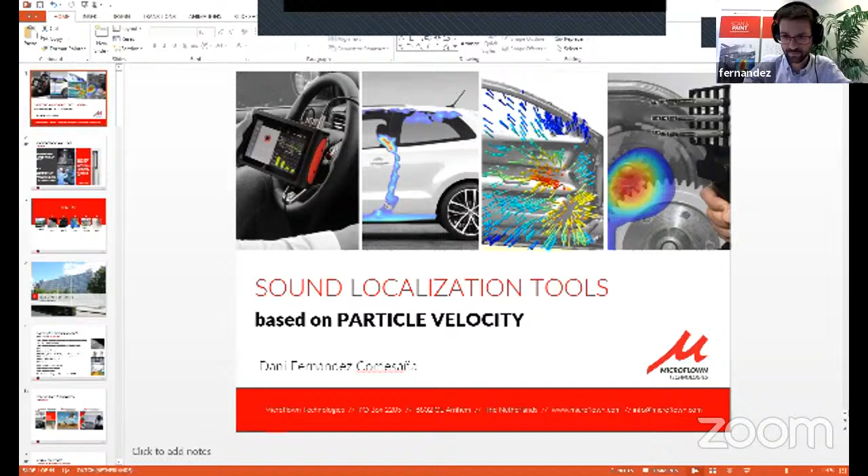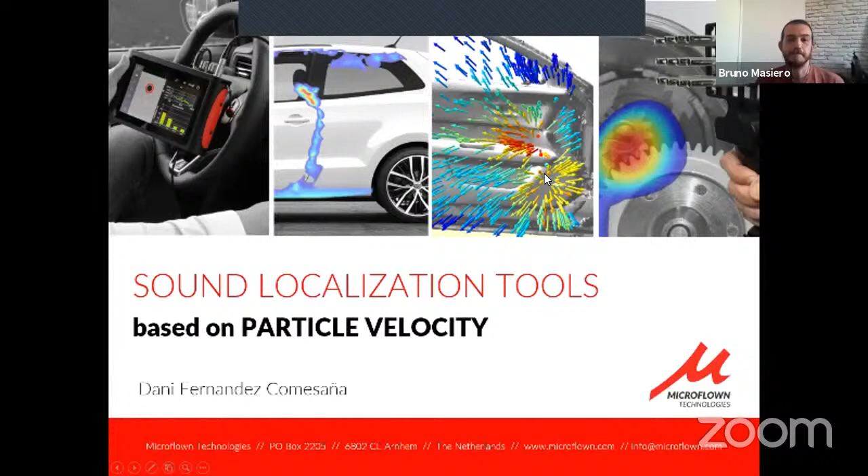Can you see the slides now? Yes, we can. All right, so I'll continue.

Oh, can you hear me now? Yes. Hello? Yes. Okay, so you couldn't hear me before, I guess. No, we could. Oh, all right.

So the motivation for this presentation is to give you an overview of the techniques and tools that we have nowadays for solving acoustic problems. This has been a constant problem for many years. For example, at the beginning of the last century, they already started making some tools that they thought were not only useful, but probably fashionable. But nowadays we still have problems, although we've had a lot of time to improve upon what we use.

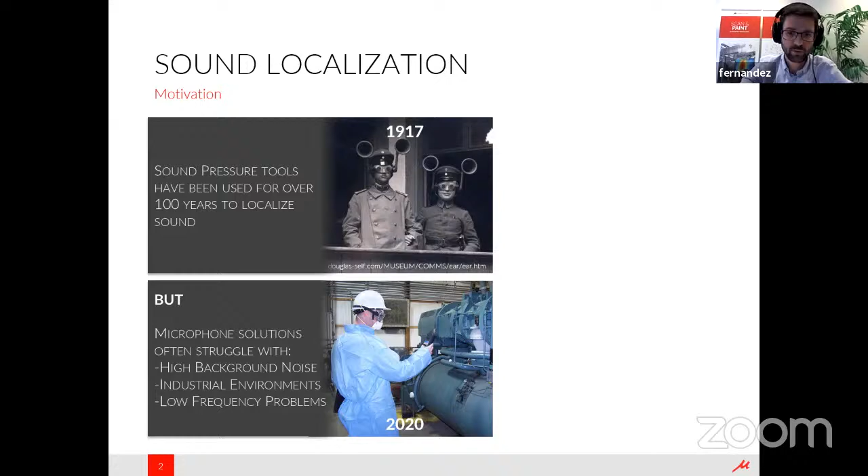Especially in environments where there's high background noise, like factory or industrial floors, and for solving problems of low frequency, it is normally a struggle to detect where the noise is coming from and what is the principal element that we have to modify to improve the acoustic problem.

So particle velocity sensors offer a unique perspective because we can measure something that is an alternative to traditional pressure microphones, which, depending on the conditions, can be very useful. Since 1994, when the sensor was invented, until today, the technology has grown and developed.

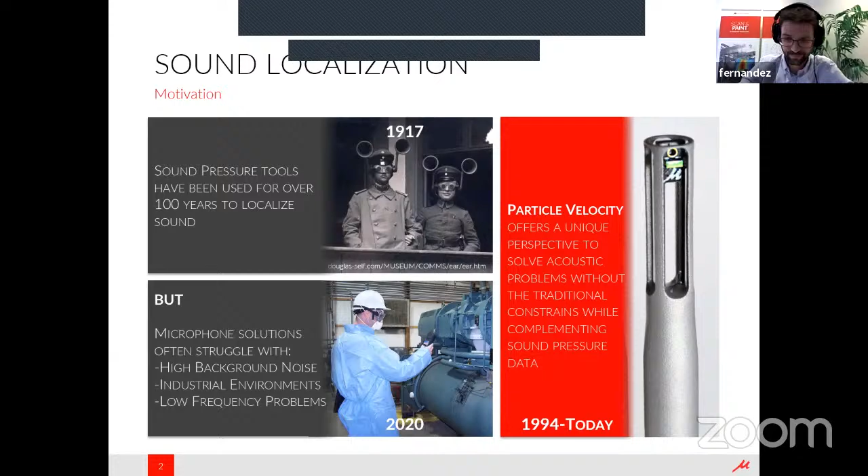Then we go into 2D pictures or acoustic imaging. Then we move to 3D sound visualization, so full control of the acoustic field. And at the end, near field acoustic holography and near field sound visualization using arrays for non-stationary problems.

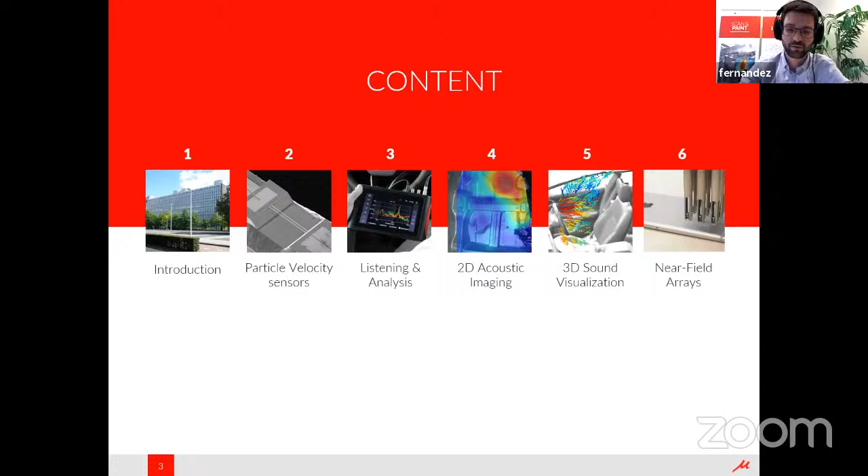So here you see the location of Microflown, the headquarters. We are on a couple of floors of this building in Arnhem. The company started more than 25 years ago when the triggering element was the invention of the Microflown sensor by Hans Elias de Bree.

At that time, they didn't really know exactly the potential or the use cases of these types of sensors. So they found their way along, after founding Microflown Technologies together with Alex Kurz, figuring out how this new transducer, new sensor solution, could be industrialized and brought to the industrial market. At the beginning, the first applications went in the direction of automotive.

Once it was proven how this device could be used, how we could prove that we actually measure particle velocity and calibrate the sensor to measure this acoustic quantity, the company experienced rapid growth, getting bigger and bigger.

So in 2010, there was a big, important landmark for the history of Microflown, because we started to introduce not only sensors, but also whole solutions: hardware and software sold together to solve a specific problem or application.

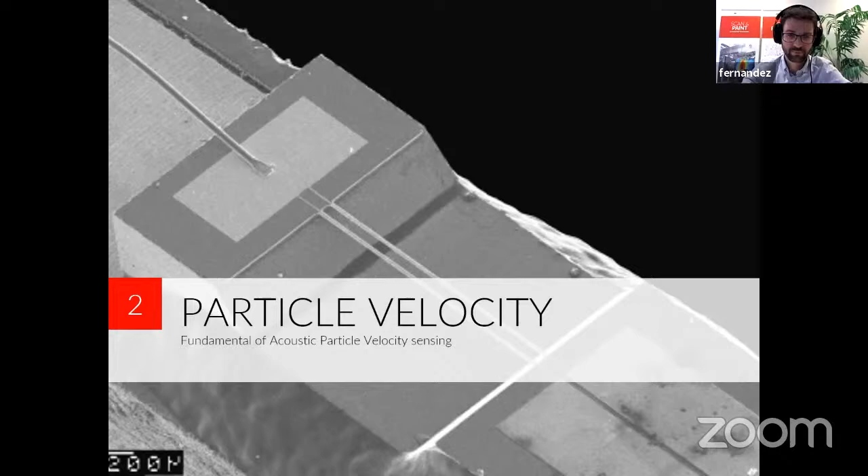So we have a broad spectrum of knowledge on the type of problems that the industry has at the moment, and we will start focusing on how to solve it with different technology. Before we move on to the specific systems, I would like to introduce a bit more about the particle velocity sensor, what it means and how we measure it. So that's why we move to the next section.

If we look at the fundamental quantities of acoustics, we can separate the energy interchange between sound pressure and particle velocity, in the same way that in terms of energy we have potential energy and kinetic energy. So if we visualize what these two quantities mean, we can have here, in the upper side, like an impedance wave tube, a piston that is moving and is compressing the air particles, getting them close together.

So when the particles are close to each other, they experience a force because they want to be as equally spread as possible. That force is directly related to the sound pressure. It is how much pressure I experience at one particular point in space.

So when the piston moves, it compresses, and then that compression travels through the waveguide, but this is local - the particles only oscillate locally and do not travel through the tube.

So when we look at the velocity of one particular particle at a point in space, we will see that these local oscillations away from the resting position will have moments where the velocity is higher and moments where the velocity is lower. That's particle velocity - it's not only how much force I experience, it's more related to the speed, the local speed of the particle, but it also has a direction associated to it.

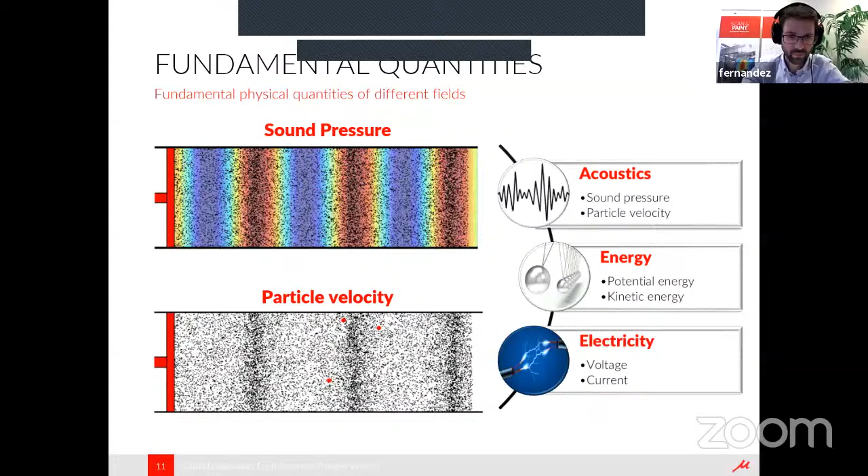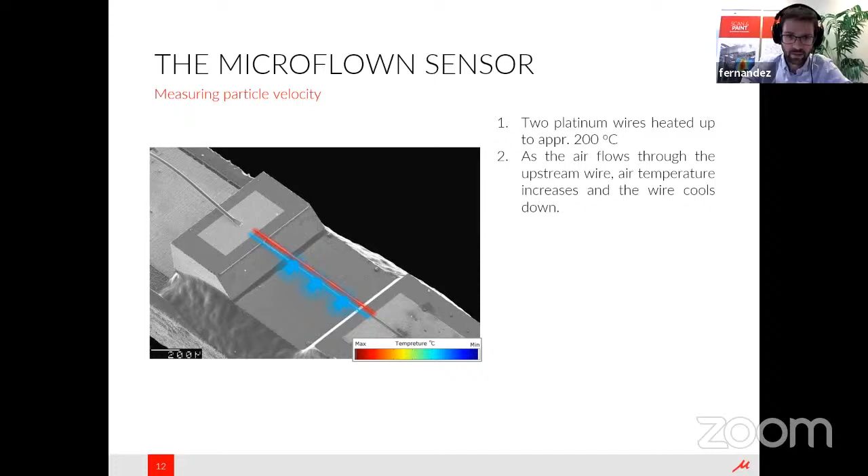And how do we do that? The Microflown sensor is based on a MEMS principle, microelectromechanical sensors, and it's not a moving piston. We work with two hot wires that are close to each other, and when the wavefront comes, there will be a heat interchange between the wire and the fluid, so the particles will heat up a little bit and cool down the wire.

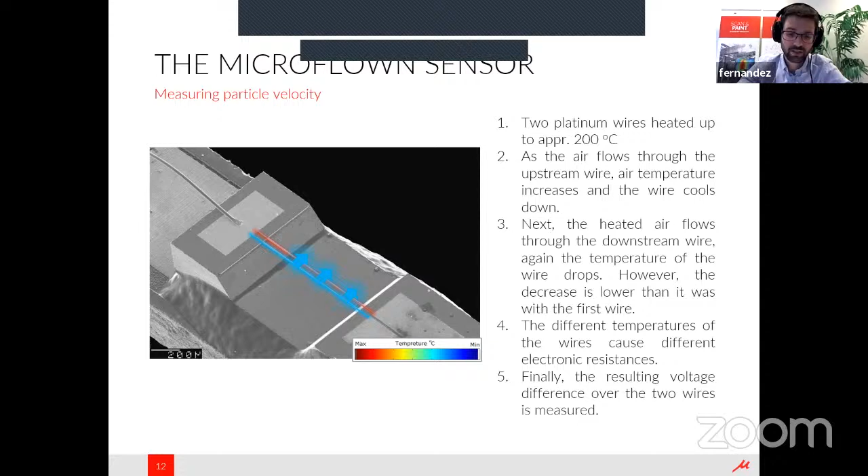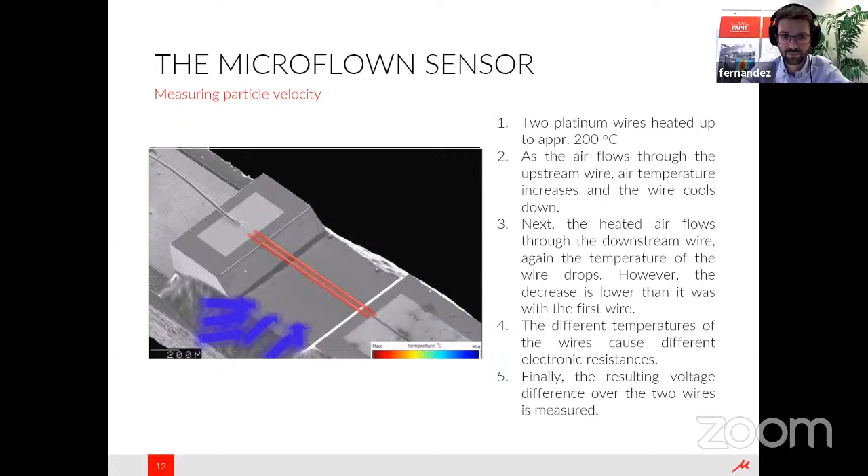And when the wavefront keeps traveling to the second wire, there will be a second interchange of heat, but not as much as the first one, because the first wire heated up the particles. So the second wire will cool down less, and therefore there will be a difference in resistance in the two wires because they have different temperature. So if we pass the same voltage through two different resistors, we can actually measure the difference between them, and that is proportional to acoustic particle velocity.

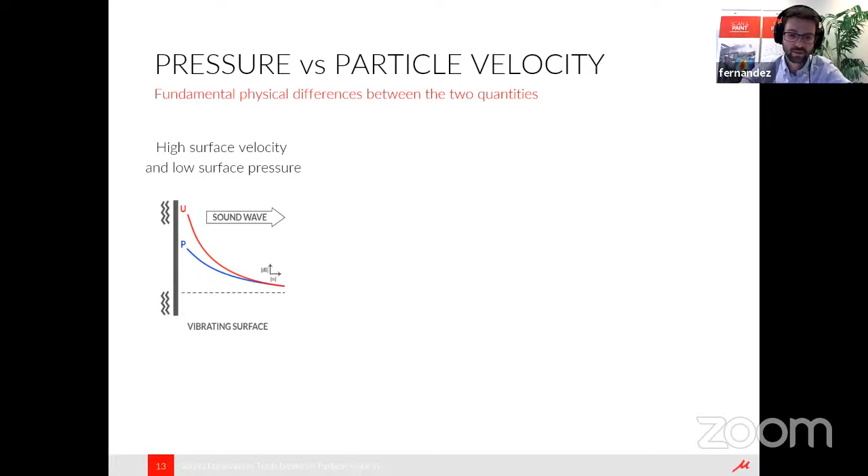But going to the practical side of things, what can we do with this particle velocity, or what can we expect in a practical scenario when we have a normal microphone and a particle velocity sensor? So if we are approaching a vibrating surface, for example, we will see that the pressure linearly goes up as we get closer, but the velocity level rises much faster when we get very close to the surface.

If you are farther away, we measure the same, let's say 80 dBs, but the closer we go, we can get 10 or 20 dBs more than the pressure if we are in front of an excitation source.

In the opposite effect, if we are in a room where there's noise everywhere because of a noisy machine in the middle, and we get closer to the floor or a wall that is not vibrating, in terms of pressure we will see a local increase because the incoming and reflected waves add up. It's a scalar quantity, and everything locally will be amplified by the reflector.

But in terms of particle velocity, there is direction to it. The incoming wave has positive phase, the reflected wave has negative phase, and the closer you get to the reflector, the less velocity you have.

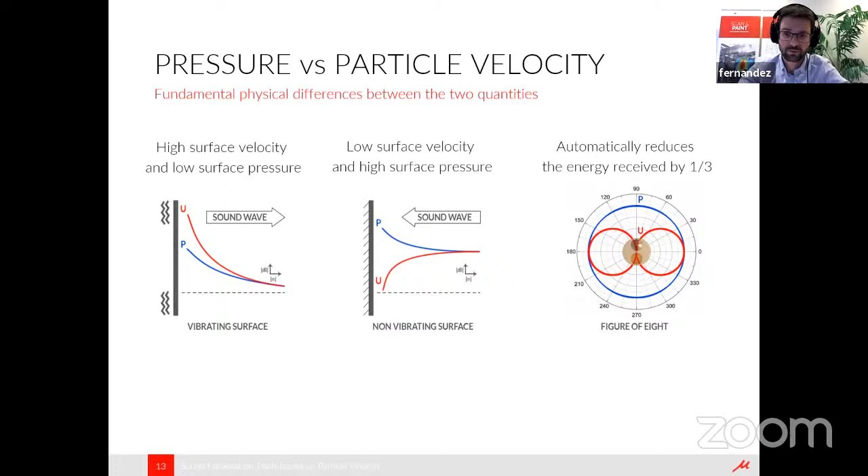So in practice, if you go close to a noisy machine in a noisy environment, you will have very high noise. If you go close to a quiet machine or a high impedance machine, velocity will go much lower. Besides that, directivity is a key feature for particle velocity elements, so for low or high frequencies we have the same capability to aim towards a certain direction and reject noise coming from other directions.

So in practice, what we have is a higher signal to noise ratio to identify more accurately the location of noise emission, and we are less susceptible to background noise because of the directivity and near field effects.

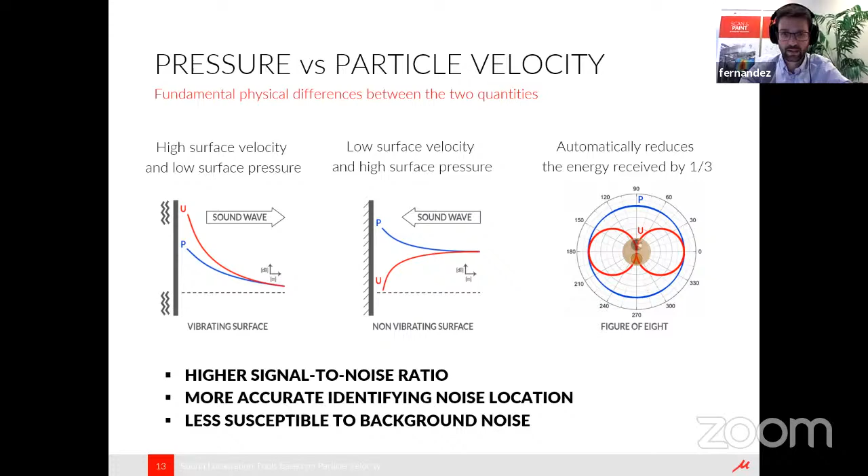Depending on the application, we can choose to mount the sensor in different probes. We have one-channel probes, so the velocity alone, and then we can choose 0 or 90 degree orientation.

If we want to measure pressure with velocity, as we will see later, it is very interesting because then we can get the sound intensity. Depending on the application, if it's a tiny miniature device, we will need a PU match, for example.

But if it's a bigger size or a harsher environment, we will have other types of probes that are more suitable. If we want the full velocity vector, we will need 3 orthogonal velocity sensors together with a pressure microphone, for a 3D acoustic vector sensor or 3D sound intensity probe, and that will be the USP probe.

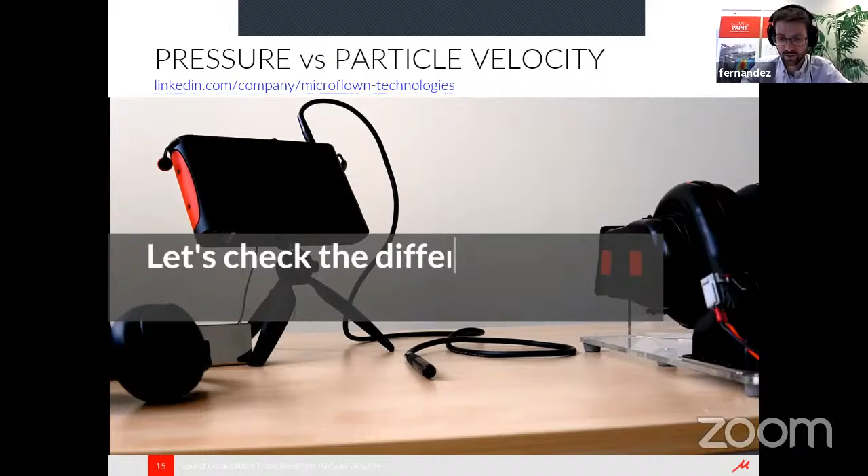So here we want to give you an idea of how we perceive the difference in a practical example. I will play a video now with a booster, an automotive component that moves air from the front part of the cabin to the rear part of the cabin. It has 2 fans, and we will hear how the sound pressure and particle velocity sound near this device.

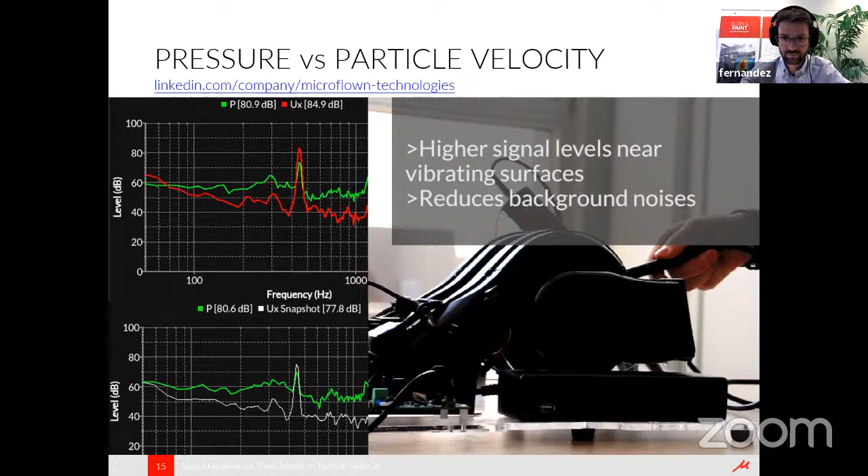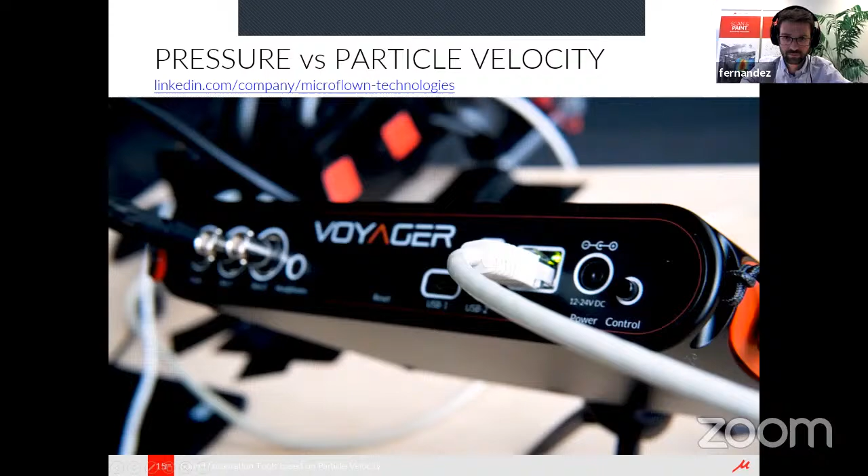Moving on to the first system, now that we have described the sensing technology and how we capture acoustic particle velocity, the first and most simple way to solve an acoustic problem is directly by listening to the different acoustic quantities, pressure and particle velocity.

We have our portable data acquisition, recording and analyzer device, the Voyager. Here we can directly record measurements, connect the probe, select the channel we want to listen to, filter a certain frequency band of interest where the noise is coming from, and even attach additional sensors if needed, for example for relative phase or relative transfer function measurements.

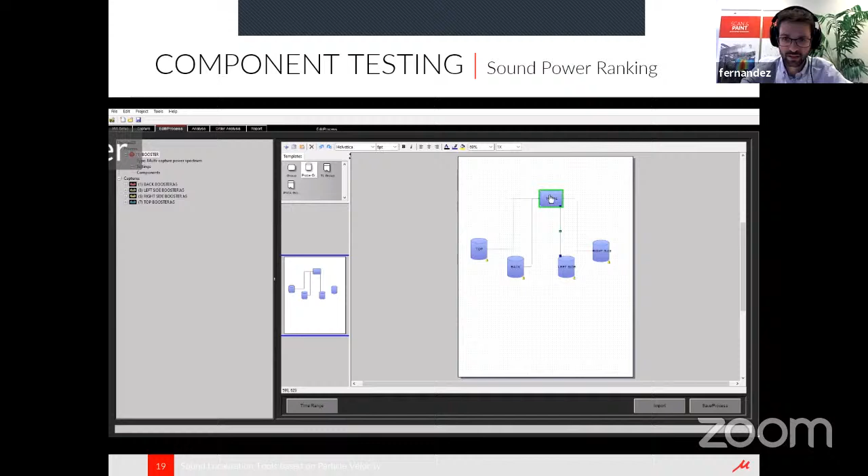In this video, we can see how we measure a device for the purpose of ranking. We just scan around the surface of interest, and then import that information into the software later. We can assign measurement data to say this machine has a left side, top side, rear side, and obtain a table to rank which part of the machine is more noisy and by how many dBs in terms of sound power for certain frequency regions. It can be very easy and straightforward to make a sound power ranking just by using this kind of platform.

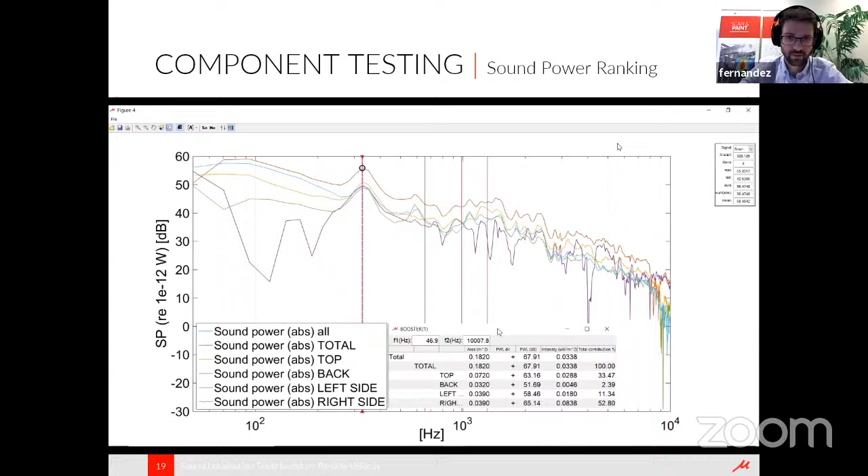One example we have for solving an industrial problem with this approach is a metal pipe company that had a very large machine, about 12 or 15 meters long, in a very big factory floor with a very long reverberation time. They wanted to see which part of the machine to improve and how to reduce the emitted noise.

So we just measured, scanning around different parts of the machine, imported the data, and directly obtained a ranking that said this machine, which cuts metal pipes, had an issue in the intake system. When the machine loaded the pipes into the cutting section, there was metal hitting each other and producing a lot of noise. So they would have to create a cabinet around that area to reduce it, since it was more than 4 dB higher than anything else, so it would be effective to apply a noise treatment there.

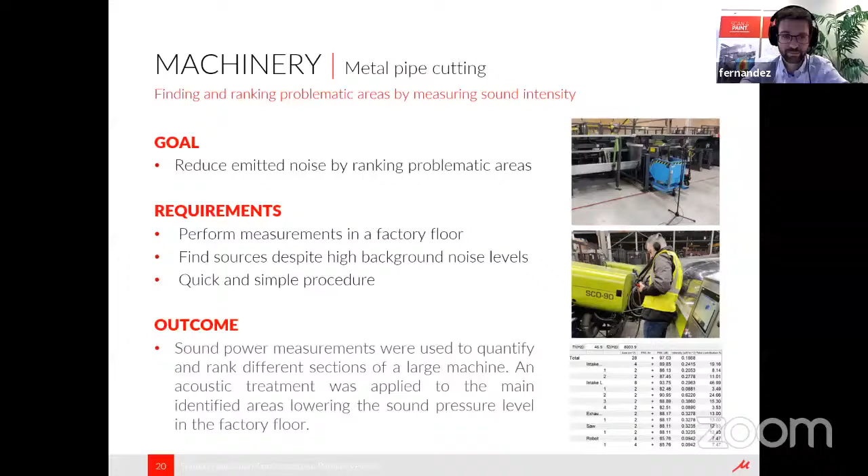And that's what they did. So at the end, they achieved a solution. It took us about 1 hour to do all the measurements and the processing, and in that time they could find the solution to the problem kind of straightforward. So it is quite effective.

In another case, this is more for the investigation on electric vehicles, for motor noise detection. They have limited access, especially the new companies, to environments like semi-anechoic chambers where they can operate their motors, because their time availability is really low. So for prototypes, it's easier for them to evaluate things in a more rough lab that's not acoustically treated. So it is very important to have a very good signal-to-noise ratio for detecting parts of the motor that produce tonal excitation.

So in this case we can see here, if we compare the pressure or velocity that we capture at different areas, the signal-to-noise ratio is much higher. That allows us to identify the weakest spots and apply local treatment, then evaluate the modification again and improve the machine kind of quickly.

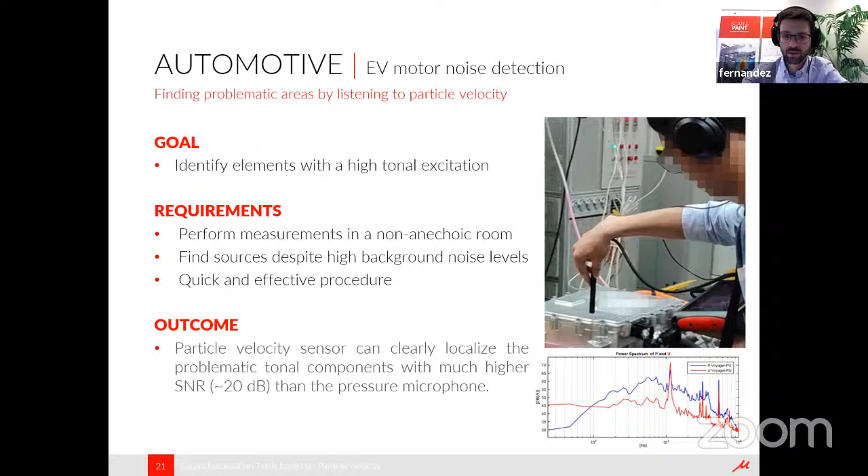But this straightforward way to solve problems is not the only one, especially when you need to communicate to other people, like managers or people above the engineers. People really like pictures, so they want to see with colors and understand what is going on or what is causing the problem.

And for that, for stationary sound fields, the solution is Scan and Paint 2D. Scan and Paint is an acoustic imaging solution where, just with one probe and one camera, we can produce these kinds of pictures that can be applied.

The same system can be used for evaluating tiny devices like a hearing aid, as we see here. Or if we go farther away and put a bigger marker on the probe, we can evaluate very large turbo compressors, piping machinery, or even cars. So it's a very versatile solution that can be very efficient for stationary problems.

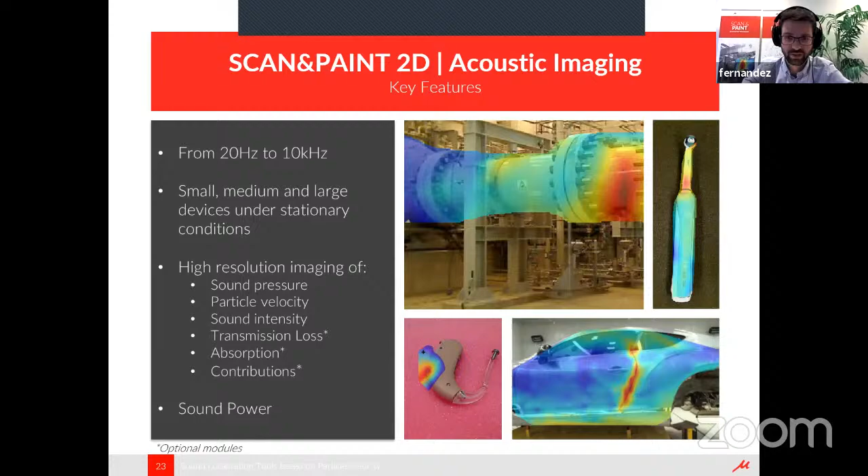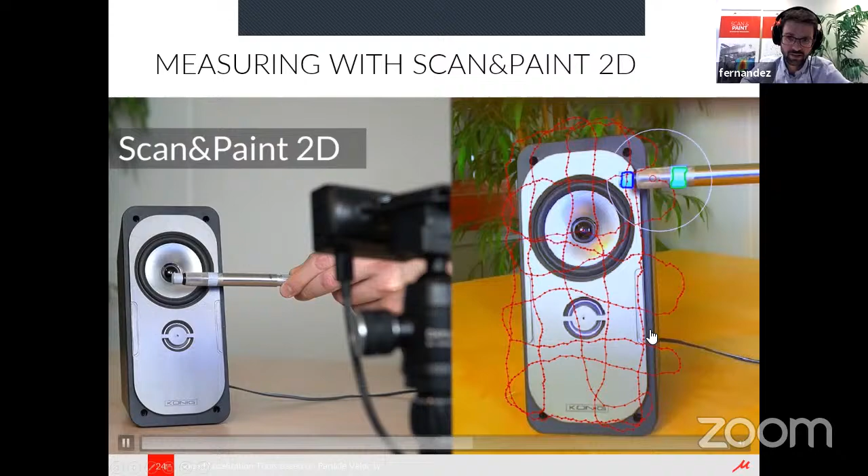And here we see a video on how it works. In this case, we are scanning with 2 markers on the probe, and the program automatically detects the position. So by mixing the signals that we capture with the position, we can directly discretize the sound field into areas and localize the excitation points for different areas.

For an application case of this type, here we have a study, a consultancy we did together with Bentley. In this case, they were interested in reducing the acoustic treatment that they typically apply to their car body. They wanted to make it as light as possible, but also keep the acoustic performance within their targets.

So what we did is evaluate different surfaces of the whole car and find out, for different parts of the car, we could see resonant panels, apply certain treatment directly to the panel, just stick thermoacoustic parts into it, and then they reduce the vibration and effectively reduce the noise into the cabin.

So by assessing this vehicle in several stages, we managed to reduce the total cost of the acoustic treatment by 15%. So it was quite successful.

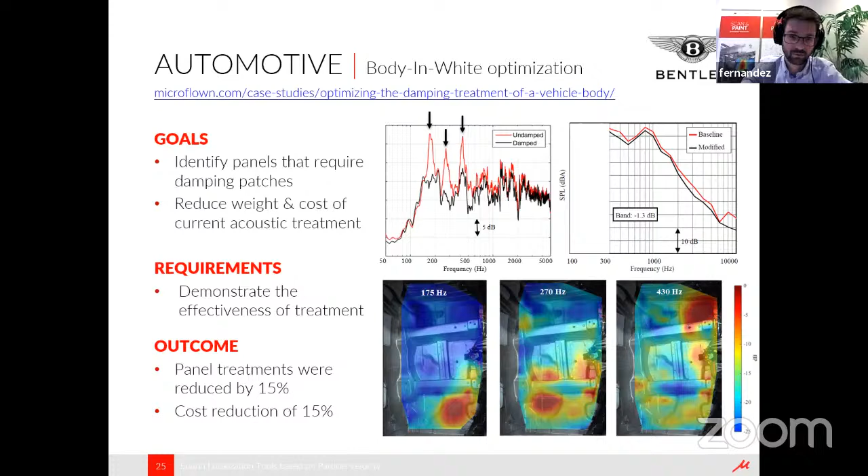And we made a publication, and they kept on using the same technique, and they have told us that also with some cars that came later, they achieved even a 30% cost reduction of the whole body package and weight reduction. So it is a nice way to use velocity to identify key vibration points and optimize the acoustic treatment needed to improve passenger comfort.

With the same system, we can also evaluate noise from compressors of big machinery. Here there was a particular problem that Rolls-Royce needed to solve, because there was a customer that bought a turbo compressor for their factory, and a third-party company installed the piping system.

And when the customers were on site with everything ready, they detected that the noise levels were way above the health and safety regulations allowed for the people who had to work in that environment.

So Rolls-Royce blamed the piping company, the piping company blamed Rolls-Royce, and nobody wanted to take responsibility. Everybody said that everybody was doing everything according to specs, so it was not their fault. After calling a couple of companies and not being able to solve this issue, they ended up calling us. After performing a quick measurement, less than half an hour, Scan and Paint results, we could directly see that there was a middle section pipe that was way higher than anything else, in this case more than 20 dBs.

So directly the problem was spotted. When they dismounted this middle section, they found out that there was a strainer, like a kind of metal grill that prevents particles from going into the turbo compressor, that was not welded properly. So it was rattling inside and creating all the noise. They successfully replaced this grill, this strainer, and reduced the overall noise more than 10 dB in the whole factory floor. So they were very happy.

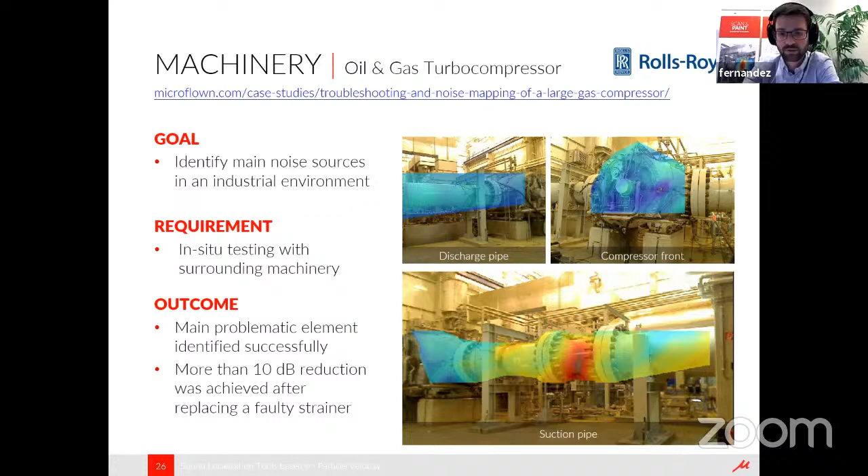So this is for 2D, and when we want to evaluate sound emission and spot different locations, it can be very effective to have just the color picture. But not all problems can be solved with such an approach. Sometimes we also need to know how the cabin interior or the environment where the acoustic field is interacts with the produced sound, and therefore we need 3D information about it.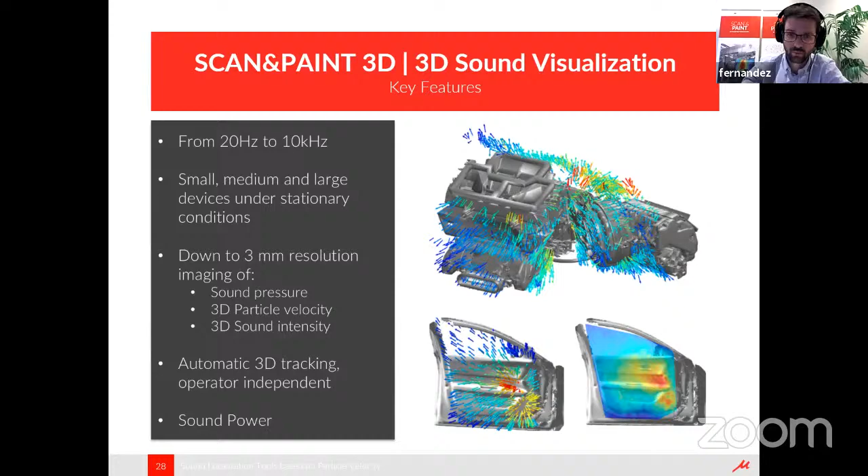For that, we have expanded the Scan&Paint from 2D to 3D, using instead of a 1D probe, a 3D probe. So one channel for the pressure and 3 orthogonal velocities. But we also need 3D positioning in space, and for that we use a stereoscopic camera that is able to track both position and orientation of the sensor. Once again, combining the signals with the position, we can capture the acoustic field in all 3D.

So here I have a video presenting how to measure and calculate all the process.

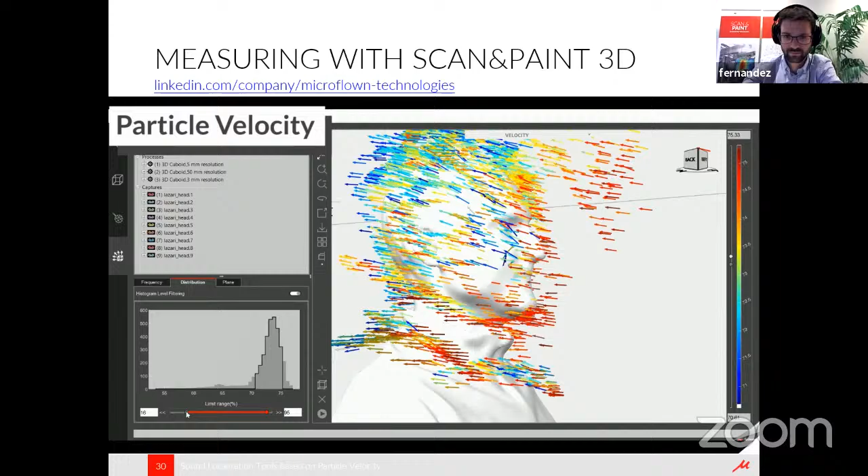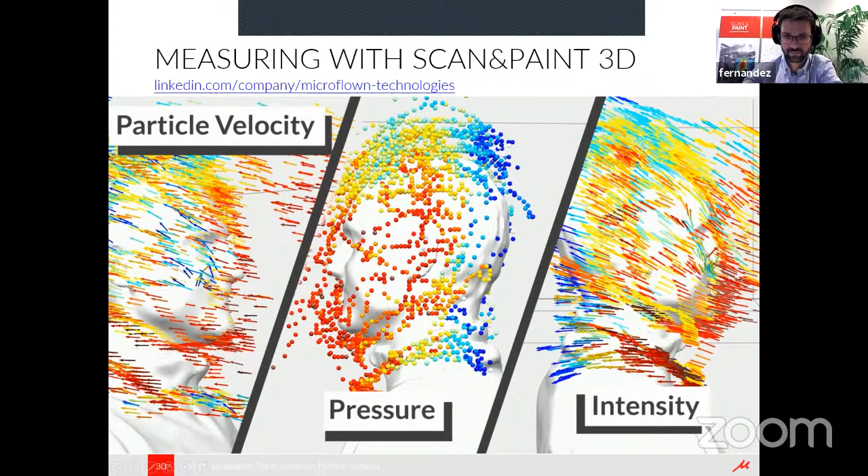As you can see, we can capture a lot of information, so it is important to have a good understanding of the problem to be able to use all the information available. If you know what is causing this, for example vorticity or strange problems with the cavity, then you can troubleshoot and evaluate if your measure is effective.

One example of the use of this technology is audio system verification. When you mount a new speaker system in a car, they want to verify that the speaker placement they chose and the type of speakers they have in the door and the frame of the car are giving the passengers the correct response and spatial distribution. For that, we can map how the sound propagates from the drivers themselves to the passengers in the whole cabin.

We see, for example, in this case from 50 Hertz to 3 kilohertz, it is clear that the mid-low woofer that is at the door is radiating directly to the driver in this case. And if we go to the mid-high frequencies or the high frequencies, 3 to 10 kilohertz, there is a tweeter mounted into the A pillar, and we can see radiation going from there to the passenger.

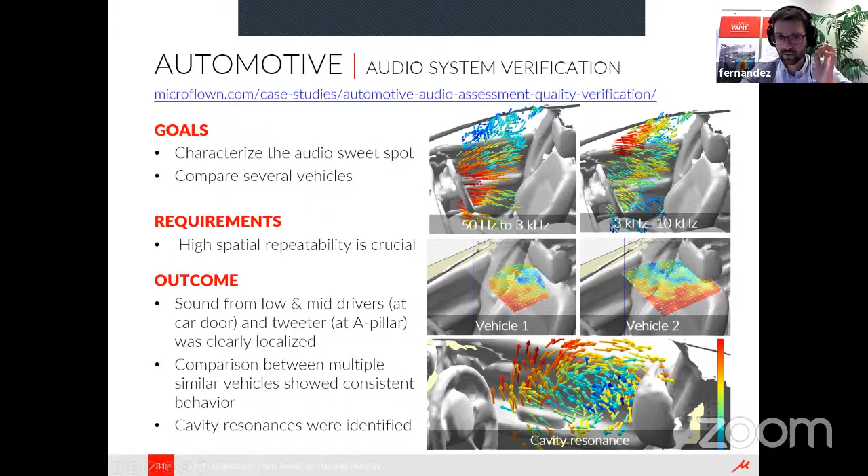But there were some frequencies where the person sitting there experienced discomfort. In this case, they reported that the level difference between the left ear and the right ear was really high, more than 10 dB. When we measured what was happening in that particular car, we could spot a cavity resonance just at the driver's ear. Around 750 or 800 hertz, we see a cavity mode that has a node in the left ear area. Effectively, that will increase the sound on one ear compared to the other, and that is not the best experience the user can have.

Therefore, they had to apply some treatment, change the position, or make the structure a bit different to mitigate this strong modal component.

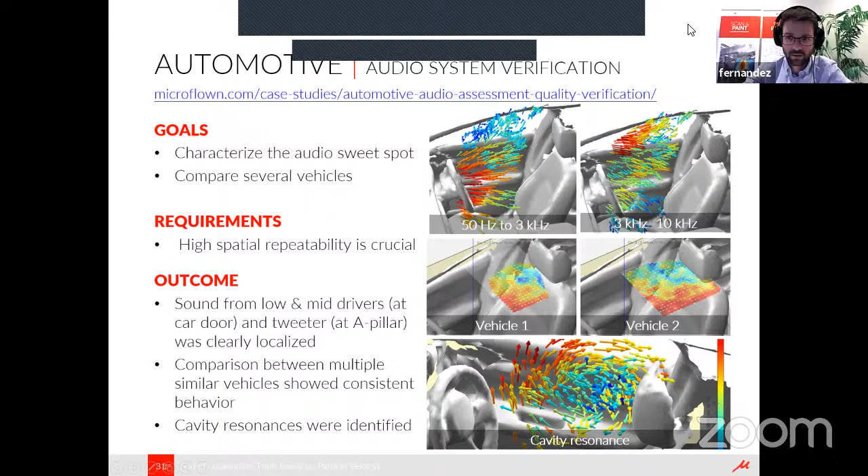Different vehicle, in this case an airplane. We did an investigation together with Airbus to reduce noise inside the cabin. It's hard to see, but it was a big section of the plane, and we needed to investigate for different frequency regions what to improve or which areas should be treated more carefully. Here we see, for example, the extraction grills, like the ones that suck the air in the cabin interior towards the piping system, which is cooled down and cleaned, and then pushed again into the cabin through the ceiling grill.

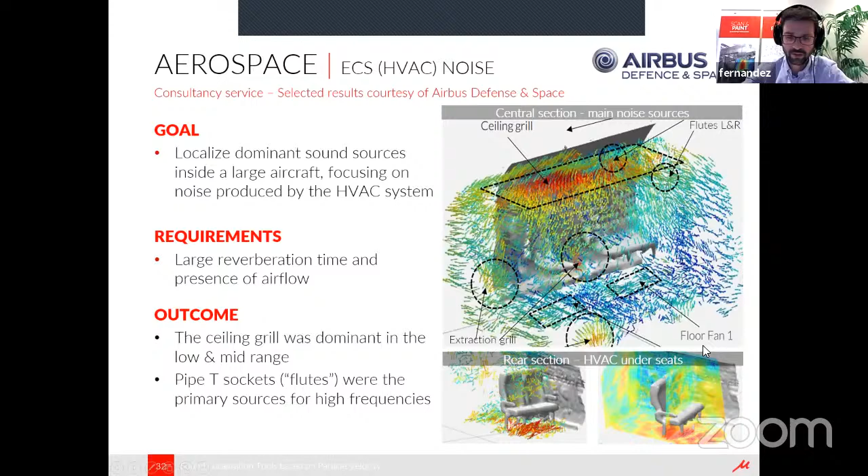In this case, low and mid frequency ceiling grill was the dominant source, but there were also some pipes with T connections that at mid to high frequencies were resonating, creating quite noisy tonal components that were really unpleasant. After this investigation, we could also spot resonance in the fans that move the air, positioned underneath the floor. For some certain areas, some fans were well isolated, but others were not. In the rear section of the plane, we could spot tonal components caused by those fans. Applying additional treatment, they could reduce the noise in the cabin.

In the last section of the presentation, we have seen how to measure directly, and listen, understand, or visualize the acoustic signals, getting pictures in 2D and also 3D.

Now I want to show a different example, for when you have a problem that is non-stationary. For example, an engine that is running up, or an actuator moving small parts, where there is a cycle that happens, and we want to evaluate at each moment of time where the noise source is. Then we need to use acoustic arrays. In our case, we have arrays that consist of PU probes, so one pressure, one particle velocity, and that allows us to calculate with near-field acoustic holography, which renders the sound field near the radiation surface.

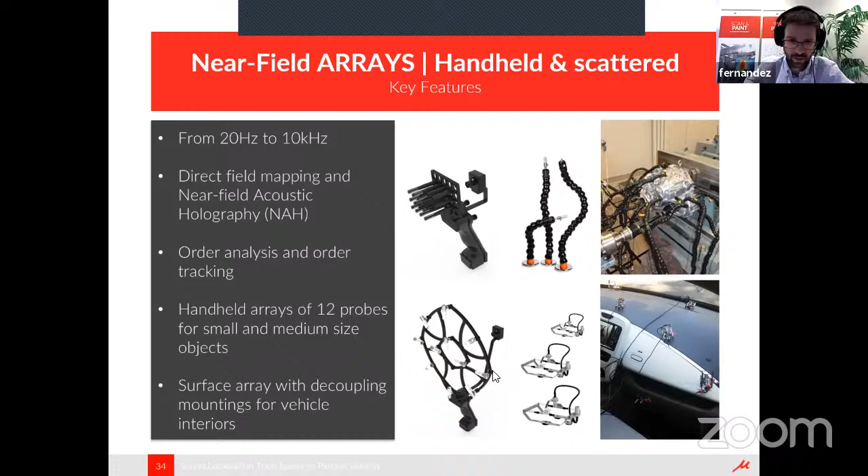Depending on the purpose, we can spread the sensors into an arbitrary configuration around the noise source of interest, or we can have a predefined grid with certain spacing optimized for the post-processing method we are going to apply. The overall picture we get is like an image render of the sound field, and we can see for different frequency ranges how the dominant sources interchange.

So for particular problems, if we want to evaluate a certain regime of operation, we can study in the frequency domain, or if there is rotating machinery, in the order domain, and evaluate and quantify for different stages of the operation what is the most problematic part. In this case here, we have a window wiper actuator, the one that moves the wipers in the car, and they wanted to optimize the behavior and determine which of the motors are the most noisy during the cycle.

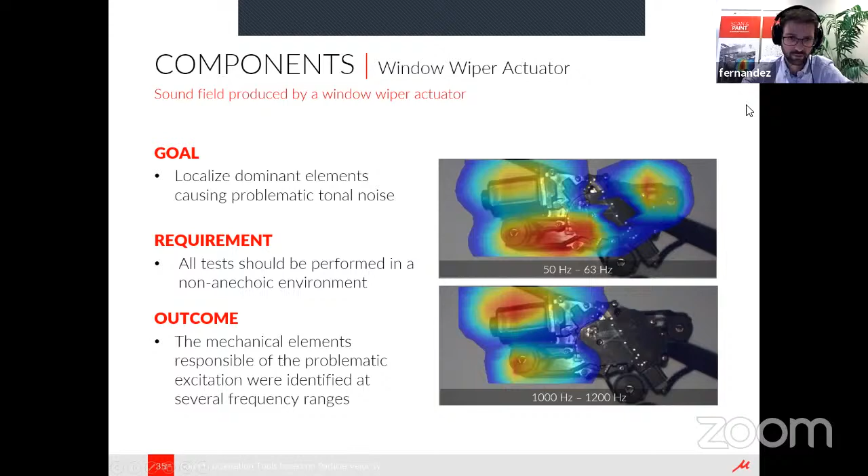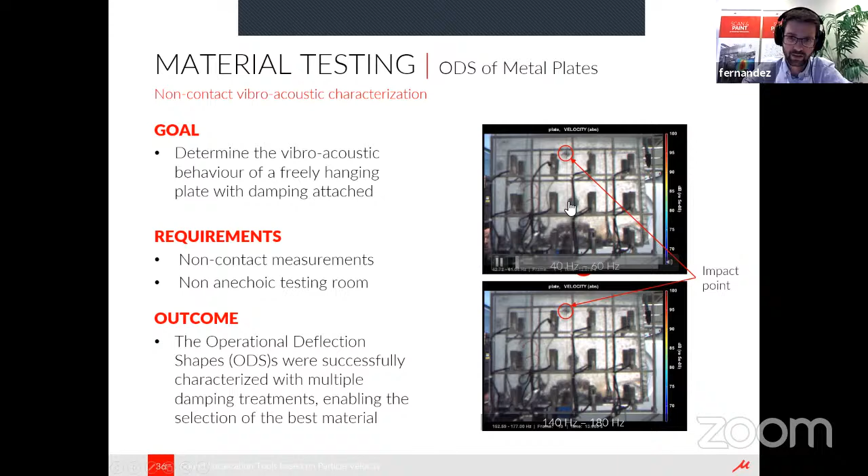Here we have another example where we use our technology to evaluate modal behavior on a plate. We see in a red circle the point of impact - behind this metal plate they have a hammer and hit it with the hammer. Even though it's very low frequency, 40 to 60 hertz, we can see the first mode very clearly on this plate, as well as the second mode, a very smooth pattern over the whole plate. In this case, they were studying how to apply different multi-layer treatments to the plate and how that would affect the modal behavior, which can be easily evaluated with this kind of technology.

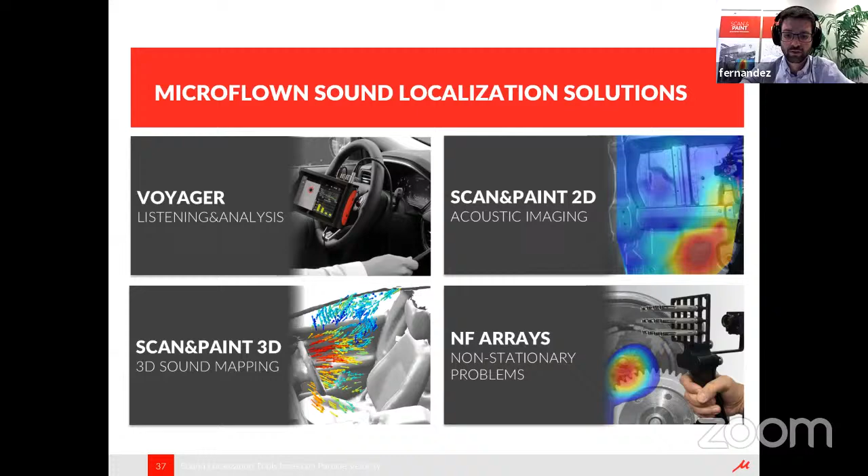So I'm coming to the end of my presentation. Today we have seen four different types of systems for sound localization, four different solutions: from the most simple listening and analysis device, which is the Voyager, to a 2D scan and paint that creates acoustic pictures mixing color with an image of the area, a full 3D sound mapping solution, and also near field acoustic arrays that allow us to evaluate problems in real time, assessing how the sound field changes over time. I hope you enjoyed the presentation, and I'm happy to answer your questions. Thank you very much for listening.

Dani, thank you very much. I'm pretty sure everybody enjoyed it. It was super interesting - somebody said it was an incredible class when you were explaining about sound field. So yes, pretty sure people enjoyed it and are grateful for that. And we do have some questions, so I will ask if Alexandre wants to start, otherwise we can read the question he posted.